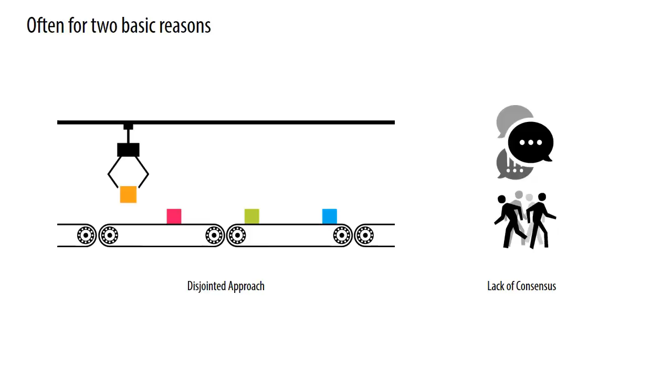So you get this idea of you're going to take things super far in some direction that you decide is important for the project. And then somebody comes in at the very end and says, oh, no, I don't like the way that looks, let's add this curve. And you're like, well, now it broke the whole reasoning. Or a contractor comes in and says, oh, I don't think I can build that, that's going to be too expensive, when it's not necessarily true. So we try to use tools to fix that process and address those two categories.

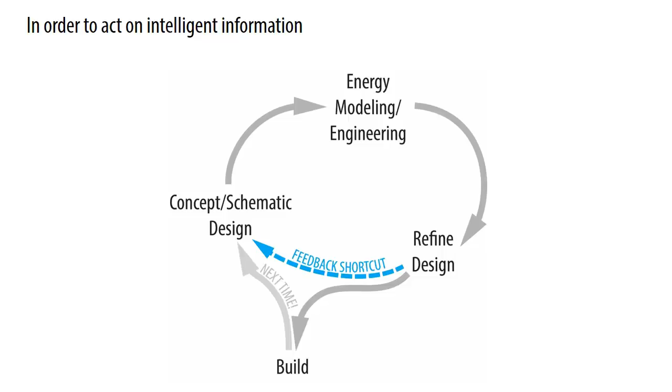So historically, we've each had our own tool that we bring to the table as architect, as engineer, as owner, contractor, whoever. But we really need a lot more than just one tool. Tools that allow us to challenge each other more and get into each other's heads a little more and each other's scope of work a little more. And tools that force us to learn a little more too, because this idea that so-and-so is the expert, so I can't challenge them, is really a big hurdle to get through. So we look for tools that can help address those things too.

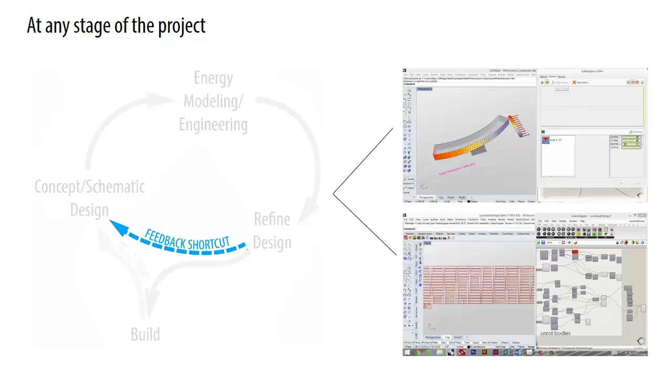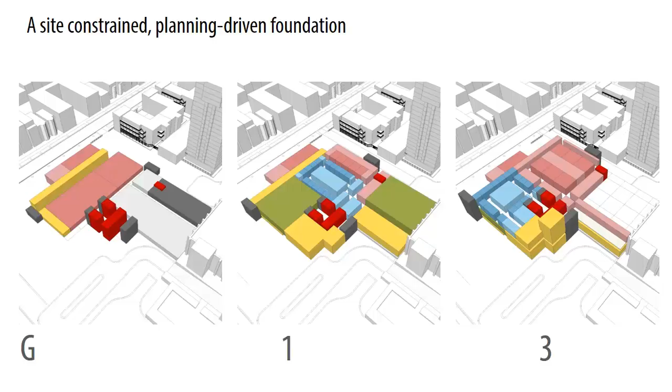And I think you guys are all here because you're interested in computation and parametrics, or used it at some point or another. Really the most important part of this is getting feedback quicker, in some form or another. This is kind of a circle around energy modeling and building performance. Traditionally you wouldn't get that feedback until too late to really do something, and that sucks. But it goes for other things too, whether it's in conceptual design as you're starting to think about the massing of a new building, or fabrication of pieces and parts as the building is being completed.

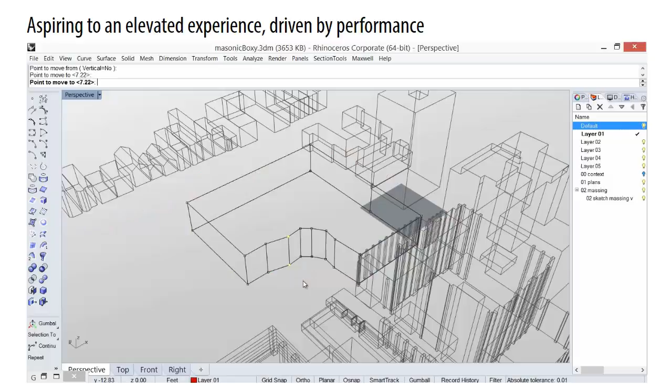So, a couple of case studies. This is a project on the north side of Chicago. This was one of the first things we did as we looked to find ways to sculpt the building to shape the experience directly, but also do it in a way that was supported by metrics. So this is pretty straightforward, using Ladybug to analyze how much incident solar radiation is hitting the building. And we did this at a very specific time because we were interested not only in achieving better annual results as far as energy consumption goes, but offsetting initial costs.

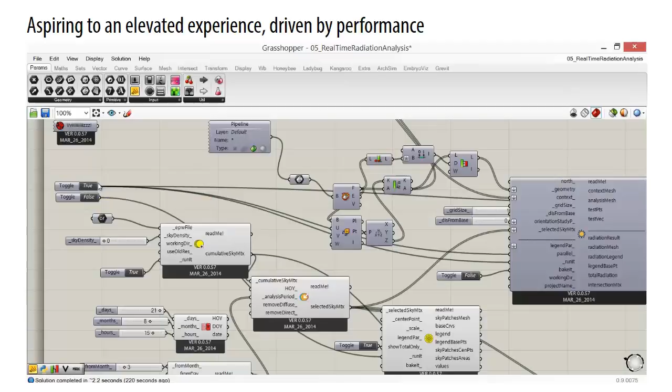So we looked at the time of year when mechanical engineers will look at a system and weather data to size their initial equipment. So by decreasing the amount of solar radiation and the heat gain on that day, it's like August 21st between 2 and 5-ish, we were having beneficial effects on both ends. So that set up right away an ability for us to say that we reduced initial cost as well as annual energy consumption. Because it's such a quick time period, we're able to do fresh solar radiation calcs essentially on the fly, and you're seeing how fast it goes here.

Have you guys used Ladybug? How many of you use Ladybug here? Done stuff like this? Yeah. Cool.

Did you optimize the building based on this analysis? We did. So the sort of shape that you saw the building in that very first slide is essentially a result of that. So we have this sort of inside curve here, and then there's sort of a bulge that self-shades a little bit. This is a west-facing facade, and you can see the sunshades here in the south facade as well. And then this bit right here is angled downwards, which helped a lot on the south facade.

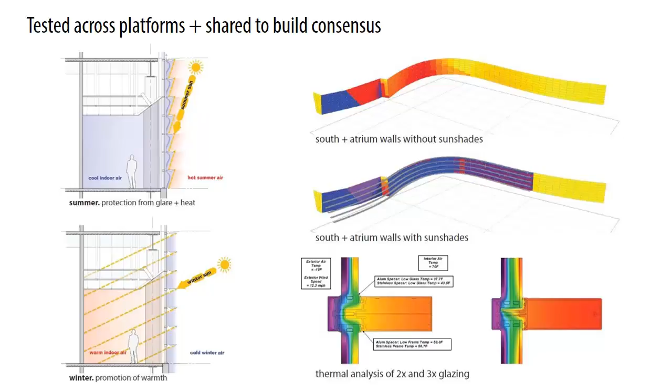So we were doing these very simple diagrams like this. At the time I had done this in Ecotect, not with Ladybug, to get a little bit better sense of how the sunshades were acting on a single floor. Around this time, we were also getting design assist partners involved in the project, and one of them was for the curtain wall system. They were also running analyses on different systems. So this is a double glaze versus a triple glaze curtain wall. They did this whole table that we ended up directly inputting with the engineers, both double glazed and triple glazed, so that we could understand the cost, the structural implications, and mechanical implications of all those things together.

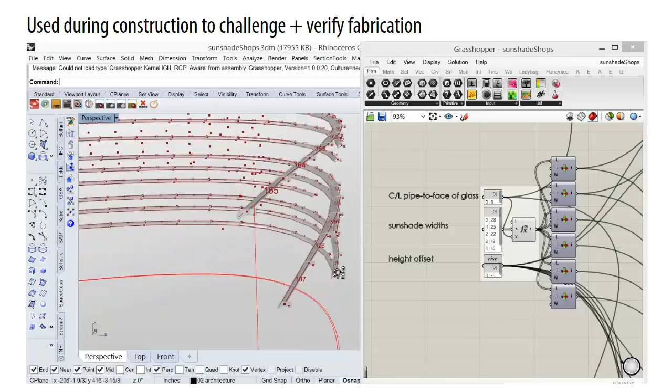A really cool story that I like about that is that we ended up with a double glazed system, but we were able to sole source it to Schuco, who outperforms every other double glazed system by far, if you're not familiar with them. In terms of U values, a traditional system might be 0.35, 0.4 U value. A traditional triple glaze might be 0.2-ish. We ended up with 0.27, even with double glazing, which is really beneficial.

And what we were able to do, again, talking about all the buckets mixing, we worked with the mechanical team and the contractor to say, look, we've got this really great performing curtain wall. We think we don't need perimeter heat, even though it's floor-to-ceiling glass. And that allowed us to take a bucket of money and say, we're not going to worry about perimeter heat, you get to put that towards your curtain wall. It's another win-win where you're using less annual energy, and you're also offsetting initial costs. So that was a nice outcome.

Let's see if this media plays. No, awesome.

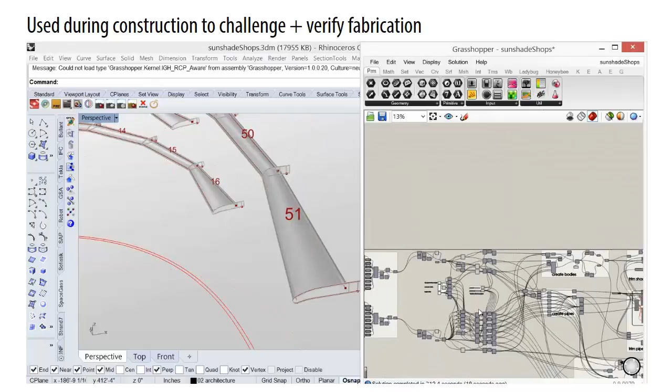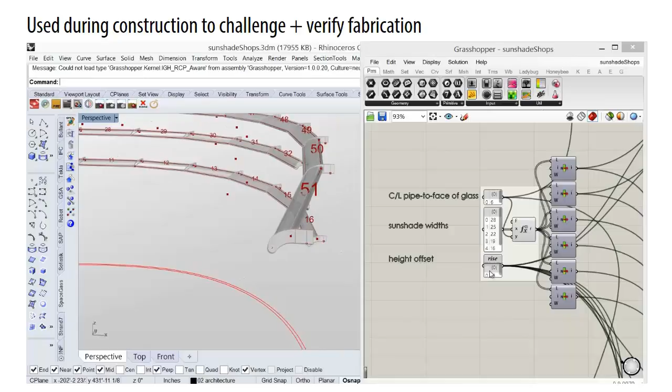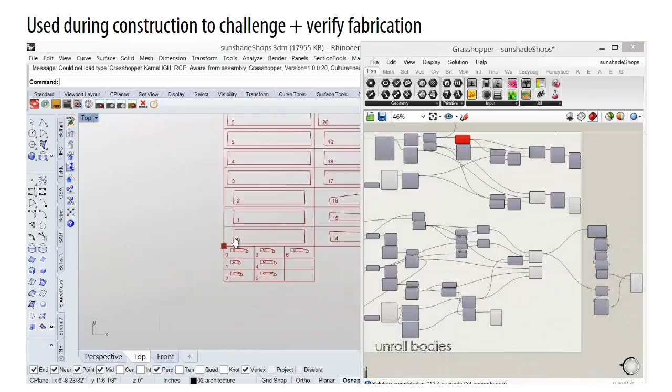So not too long later, as we were in construction, we got into a little more detail with the sunshades that I pointed out earlier on the south facade. I had a lot of back and forth with the contractor on this one, as well as the curtain wall design assist partner. There was a lot of concern that they couldn't actually build these because it curved in plan, and our sunshade had an arc to it. It was also angled down slightly because we found that was better for shading purposes. And they were like, wait, you're curving in section and in elevation and in plan. I can't do this unless I totally break the bank.

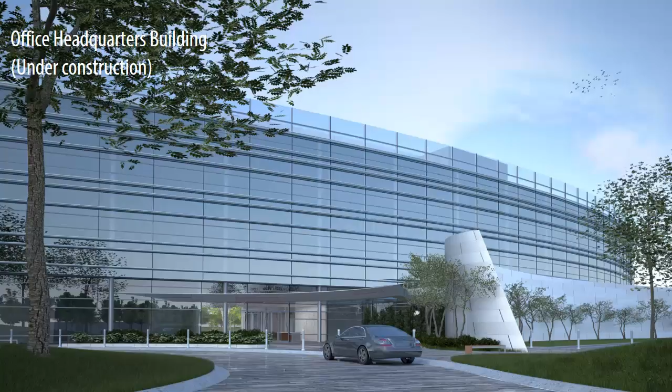And so what I used this tool to do was demonstrate to them how they could actually unroll each one into single sheets, and I have the numbering system corresponding back to that there. As they gave me more information about how they were able to fabricate these pieces, I was able to create parameters to adjust things and make sure we were still happy with the outcome. And that led to us being able to actually pull off these sunshades, which was a great way to use the parametric tools that you don't oftentimes get to hear about.

Did you get any variation from those shades, or were they all similar, or did you do some sort of a cluster and say, I got like 10 of them that are similar? So we wanted them to sort of taper off to nothing as they wrapped around the curve of the west facade.

But we didn't want them to all end uniformly. They sort of staggered in the way that they ended, which led to a chunk of them being the same in the south facade. The tapered ones being different along the ends, but even still, sometimes over here was still the same as up here somewhere. So I was able to quantify the number of unique profiles for them with this as well.

How early in the stage of the design did you do this? Or was this like? This was during construction administration. Because it was a design assist partner, they actually started their shop drawings as we were drawing our construction documents. We let them go to town on it, and then once we were done with our construction documents, we started reviewing the details of these sunshades and more specific.

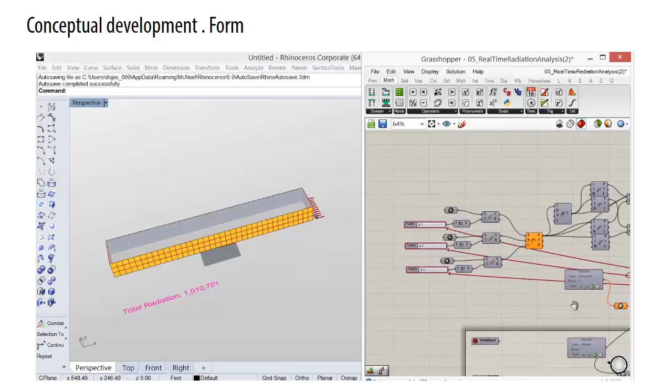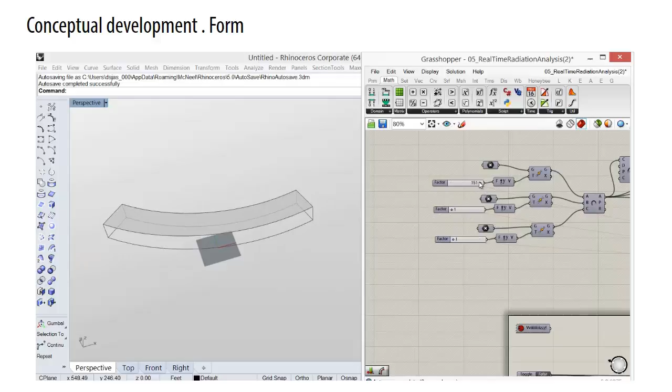What do you think is the best way to document, during CDs, a design like this, to make CA go smoother? I think it probably depends on the delivery process. Because this one had contractors and design assist partners on early, it was different. If you were doing a design bid build, I would probably actually do all this and have a sheet or a set of sheets that number coordinated each one, because otherwise the contractors are never gonna do that themselves, even in a competitive environment. It'd be pretty rare. So in that case, I'd want to do it as early as possible.

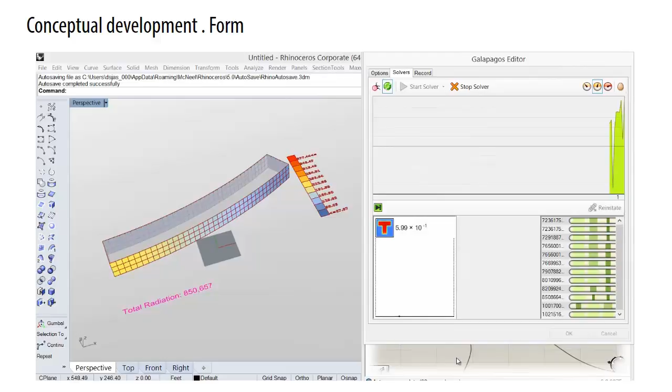In this case, I was actually using this tool to make my life easier, so that as I was reviewing the shop drawings on the shades themselves, I could feel comfortable with what they were showing me, because they were using traditional 2-dimensional drawings. But I shared this with them, obviously, to prove them when they had issues and things like that.

So this is an office headquarters building under construction in Oak Brook right now. You're kind of seeing an entry here, and there's a front yard, backyard thing going on. This is the back side. We have an architect on site daily, and he sent me this photo not too long ago, and I just thought, oh, that's pretty cool. So good to see it being built.

In terms of design process for this one, I think we tried to take what we learned in Masonic and really apply it and look for more tools that we could use to get each other talking more and get the building working a little better. So back to my complaints about people not always being in alignment and sabotaging each other, either intentionally or not realizing it. We started off the whole project by saying, all right, what's the most important thing to you? And what was great is on every single level they had at least one or two things in common that we could respond to.

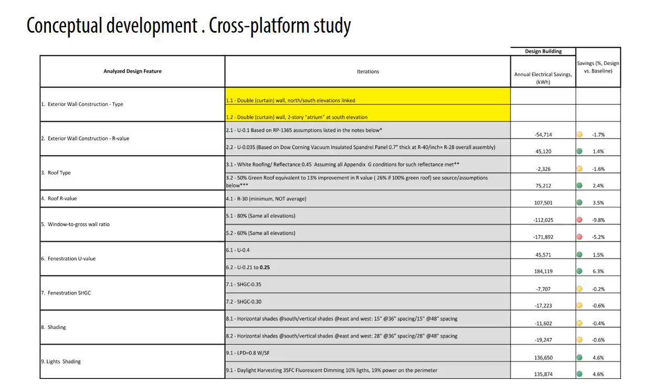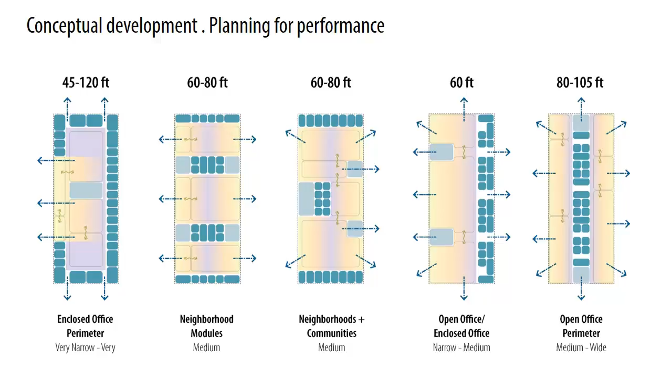And the one that stood out the most was the company that's occupying the building. They're in 4 separate buildings now that were all built anywhere from the 60s to the late 70s. And there are these super deep floors with no windows, and they all wanted more light. So, to be totally honest, if we wouldn't have pushed it, they would not have cared at all about performance or sustainability. But I know they care about daylight, so we're going to use that as our excuse to push this.

Let's see if this is too long.

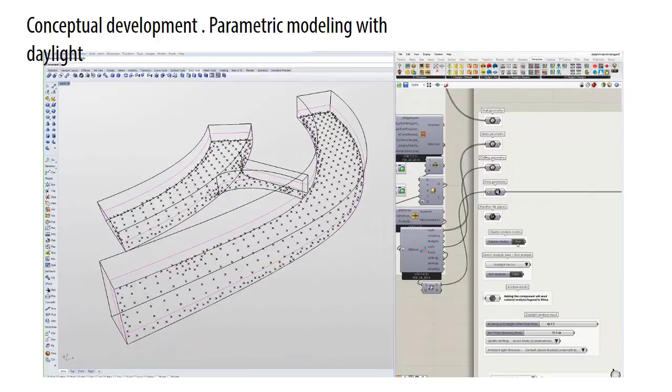So one of the first things we did was look at massing, again trying to optimize for solar radiation.

This time though, we had enough wiggle room on the site for the building to do a few different things. We had a hunch we wanted to curve it, so we built in these parameters to test it, and tested it in the summertime at that peak heat gain or peak cooling load I mentioned earlier, but also started looking at it in the wintertime and tried to balance the two. I was really hopeful that once we got into Galapagos, I could write a formula that would magically make it the best it could possibly be.

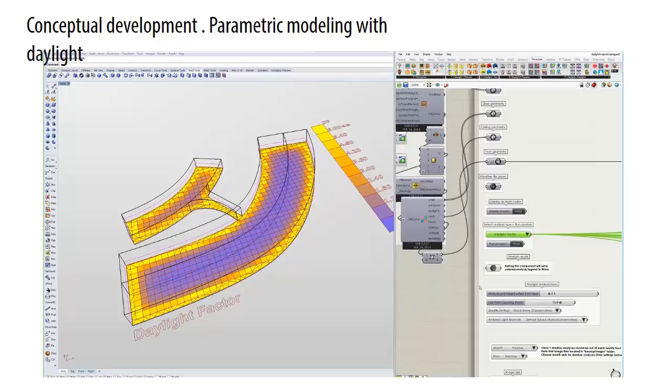Couldn't quite get there, so I ended up real-time displaying the information. There was an iteration after the one you're seeing here where it showed not just the summertime total radiation, but also the wintertime, so I could try to balance maximizing it in the winter and minimizing it in the summer. That was a useful exercise.

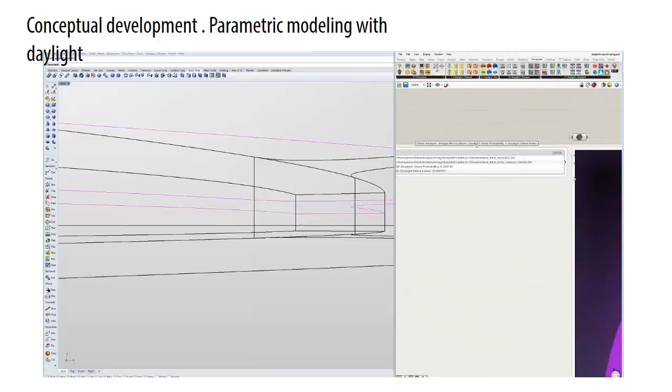If you haven't used Galapagos, it's a pretty powerful tool - it's like guess and check on steroids. If you're looking to use it, I'd highly suggest checking out David Rutten's blog posts. He's got two or three of them about defining fitness formulas and evolutionary modeling. They're really good and don't take too long to read - it's not really long copy.

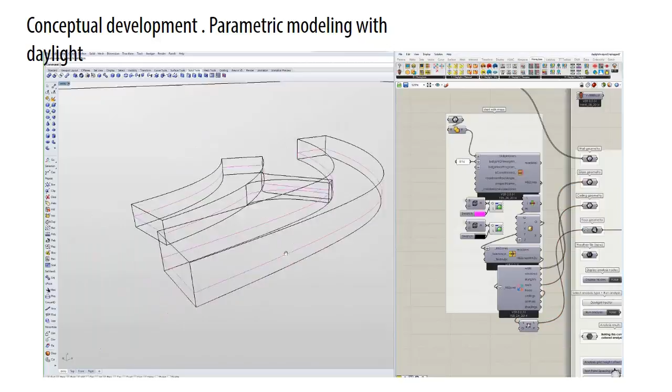So while we were doing that, we also had our mechanical team running iterations and iterations and iterations. They happened to use eQuest - I would have rather they used Energy Plus, but you can't always get what you want.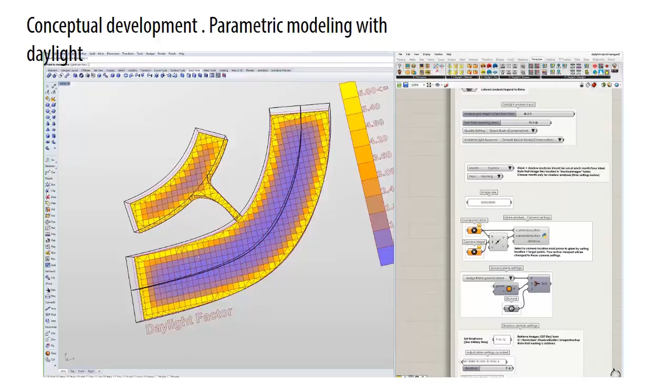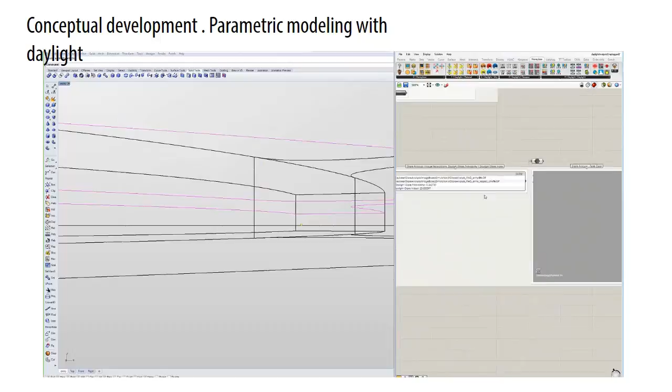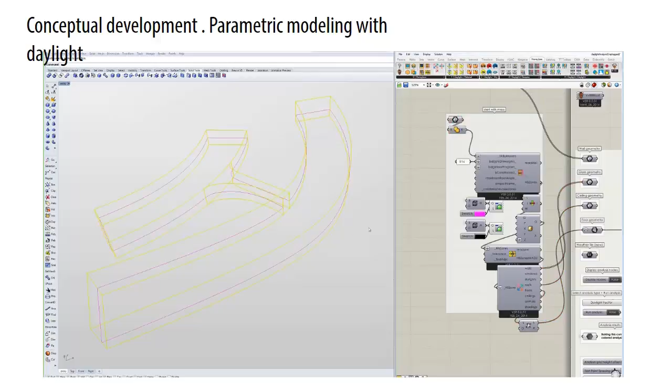What was great is we were able to ask them, okay, don't just tell me my annual electrical savings from any of these moves - also tell me what your peak heating, peak cooling, and vent requirements end up being as a result of all these things. That put us in a really powerful position to say, okay, we know we don't want the sunshades to be more than two feet deep because then they block too much sun and you lose what you want in the winter. And by the way, as a result, here's how many tons of cooling you need versus being saved - five tons or something like that. That was a great metric.

And this time the engineers were ESD.

While we were working on those outside-in factors, we were pushing on the inside out. So we started having workshops with the tenants about how they wanted to work, knowing that where they put closed rooms has a pretty big impact not only on energy use, but also on the daylight - how much light you can harvest.

So we started talking about, alright, if you've got these closed rooms and light is important to you, and this is where you really need them to be, then I'm going to make the building respond like this. So if you're really in love with putting a bunch of offices on the outside, that sucks - I'm going to make you put an atrium in, and your building's going to turn out differently. So there was simultaneous reviewing of all that stuff.

And while we were making little cute diagrams like these, we were also showing them metrics of how a different shell would perform. We used continuous daylight autonomy - I felt that was the best factor to use, which basically says how often you can rely purely on natural light, and if you can't rely on it 100% of the time, using partial credit, whereas other metrics don't.

So we were showing them these things, and then saying, okay, look, this is what that does to the shell of the building, and that's what this does to your light loads.

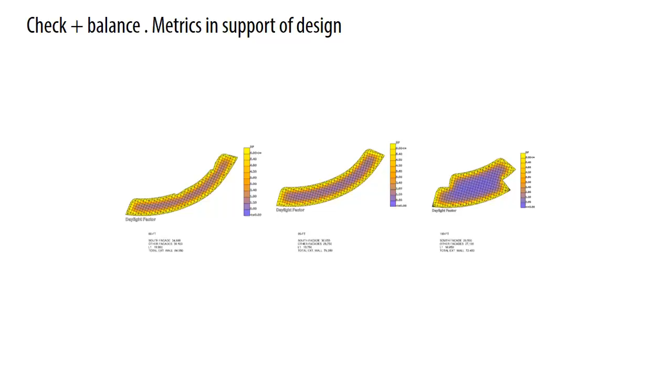What I really like about these early models and these tools is that you can use the same very simple model to render an idea as you can to simulate and test an idea. I don't have a recording of it, but also the same very simple geometry lends itself pretty well to being interoperable between other systems like Revit. So you can do a lot with very little, and I bring that up in response to your question because less means less time. So if you've modeled your mullions as perfect little rectangular cubes, it's going to take a lot more time than if you just model it as a simple plane or a T-shape.

Would you do a simple model of an area first, then more defined, to see where you might need to tweak things? Absolutely. So when we were doing these a little bit later, we picked the west, the south, and over here on the east, and ran the simulations at just those locations.

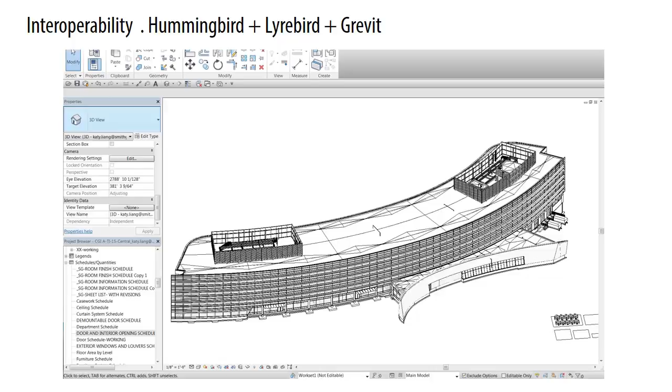Glare is one of those really hard ones because everyone wants a plan-based simulation to understand what's going on. And every metric we have for looking at glare in plan is basically a guess, albeit by a group of engineers and lighting experts making a guess. It's just not quite there yet because at the end of the day, it depends on what you actually see, and we don't have that.

Are you getting clients asking you to look at these things, or is it just Smith Group or the leadership there that invested to divert actual project dollars to letting people spend time on this?

Not necessarily either, actually. This was something done just as part of our design process. Because we knew we had to build a simple model for X or Y or Z, we just did this, and we showed it to the client so they would know. It was funny because there were some engineers within the company we were working with that were really into it, but there were a lot of people, especially the ownership, that were like, I don't really get it. We'd talk to them about it and they'd say, okay, I'm glad you did it, and move on. But what was actually really great is, as a result of having done it, there came a point where the contractor was like, I'm really sick of this architect trying to do this long skinny building.

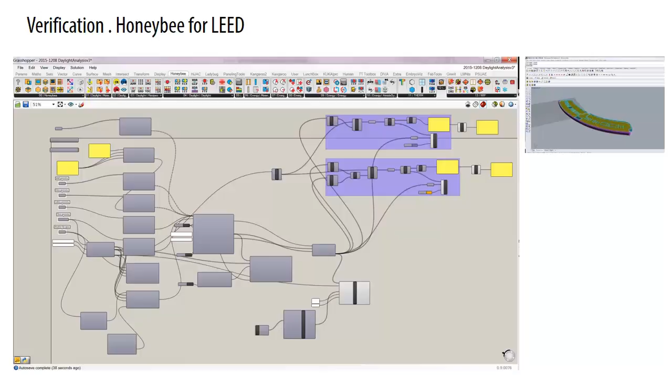I hate the perimeter to volume ratio - it's gonna cost too much. Without getting too much further into it, we quickly showed what this looks like at different widths, and the one on the right is what the contractor was pushing for. We said we could consider that, but first you need to know the effect. The client responded immediately - no. So as a result, even though they didn't ask for it, it became a really important driver for the project.

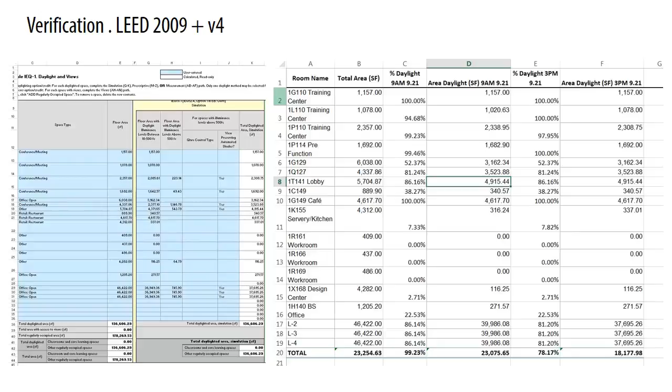As Smith Group leadership has seen us use this tool over the past 4 years, they're more and more interested. I find it fairly easy to convince someone on the design side or design leadership to buy into this, but I run into issues with a project manager or managing principal who isn't watching what's happening - all he sees is what you're doing per day and what he can bill toward what you're accomplishing on a set in Revit. This doesn't compute, and that's where I end up hitting roadblocks a lot with this process.

For sure. In the ideal world, I think we've been at places where it's just part of the design process, you don't even talk about it - but it's not like that everywhere.

No. So when we were introducing these tools at Smith Group, at the beginning there were always some people interested in it, and you just made it part of everything you did. And some people - project managers in particular - could be a tough crowd.

But we just took the approach of asking for forgiveness rather than for permission. And when they started to see it being used enough, and that the projects weren't being hurt financially internally as a result, more and more people started to become interested.

I think the industry in general is getting a lot more interested in these tools as clients gain a little bit of knowledge about them - even if all that knowledge is 'oh, I heard that's a thing and that looks cool when you do it. I don't know what it is, but it looks cool.' And that helps win work, which helps win over people who might otherwise be a bit cynical.